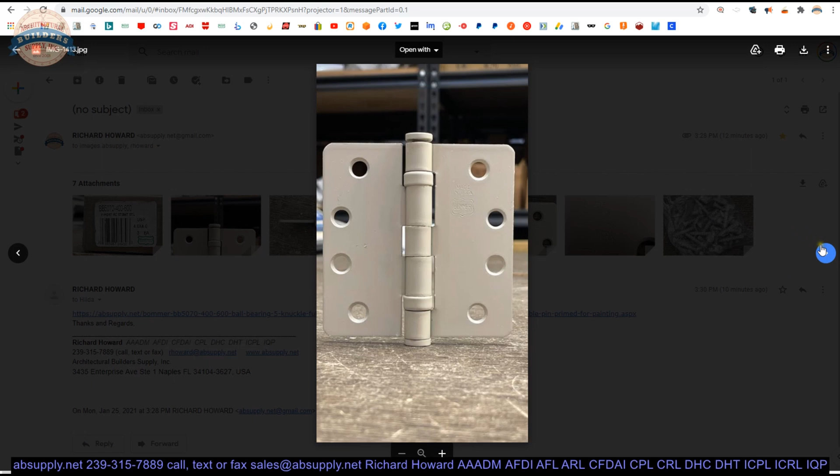Here is the item that we are looking at. There are some images linked to down below. Let's take a look. Here is our box showing our part number. That's our hinge. That's showing the swage on the hinge leaf there. That's the bend. That's what literally makes it a full mortise hinge. When you change this bend on one or both leaves, you're changing inherently the DNA of the hinge.

The back side of the hinge. Please note these bearing packets. Just study these vertical lines. I'd like to point something out to you in a moment. The logo, the knuckle construction, close-up of the Bommer logo, made in USA. And then your screw package.

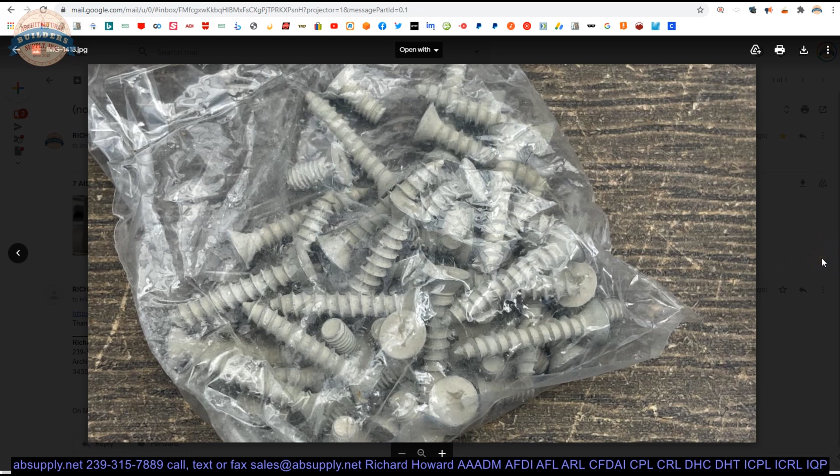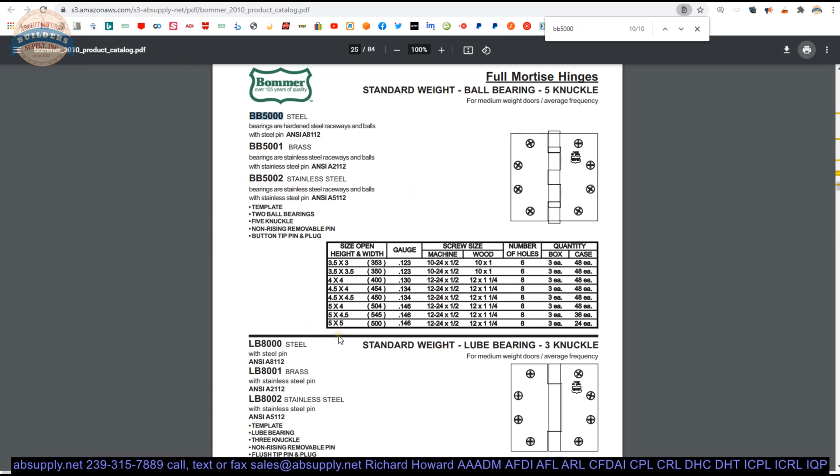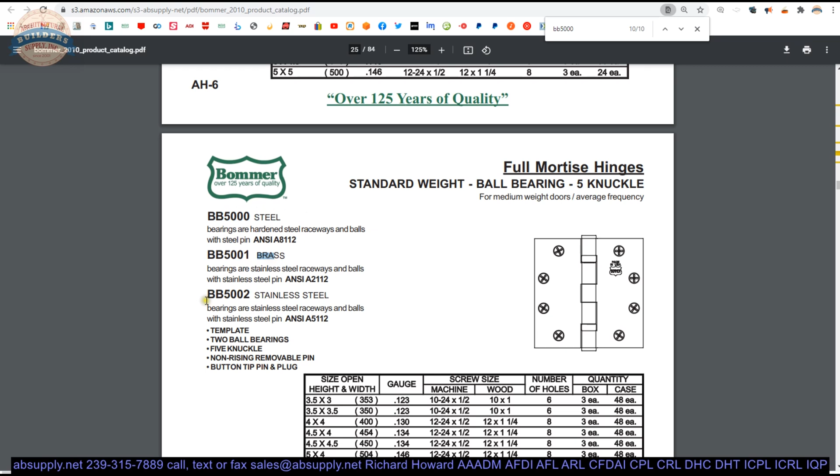Now, there is a link below this video to the cut sheet, and here it is. BB5000, that's the series of hinge that we're dealing with, and I'll show you how we get to the 5070. And the important part about this is it gives you how the part number changes when the base material changes. This would be a BB5071 in brass, a BB5072 in stainless steel. Gives you a chart of all of the available sizes that you can order this hinge in. Obviously, we're doing a variant where we have a radiused corner.

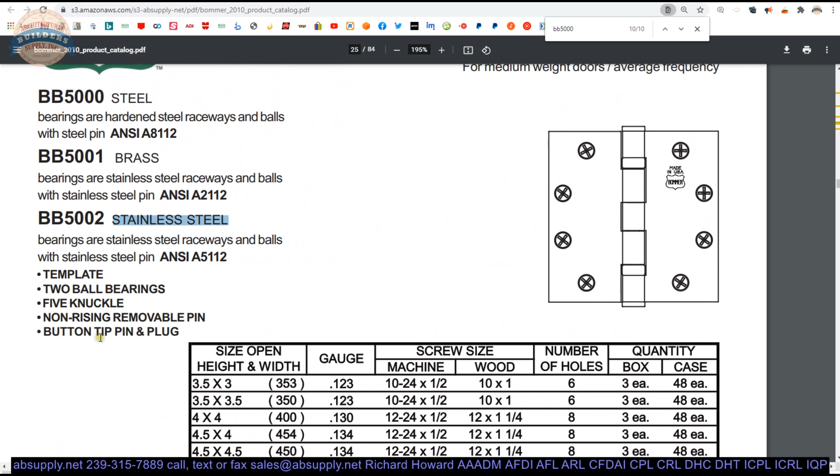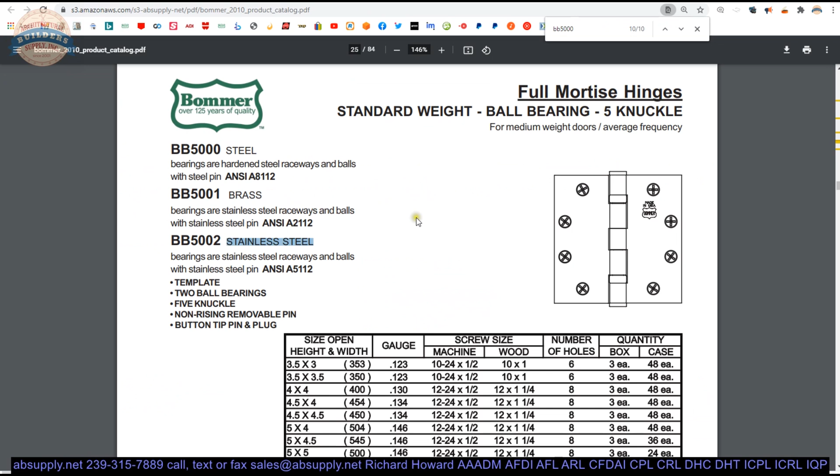Now, you'll note that vertical alignment of the barrel. Okay, nobody really thinks too much about it, but some people do. There are options. You can do a 3-knuckle hinge. This is like a concealed bearing. It's a cleaner look. So if you're concerned over what that hinge looks like, you can order it as a 3-knuckle, and you won't see those bearing packets. The friction reducing part of the hardware is concealed. A really nice looking finish, because that's going to be kind of what you see when the door is closed, this perspective here. Okay, so that's the cut sheet.

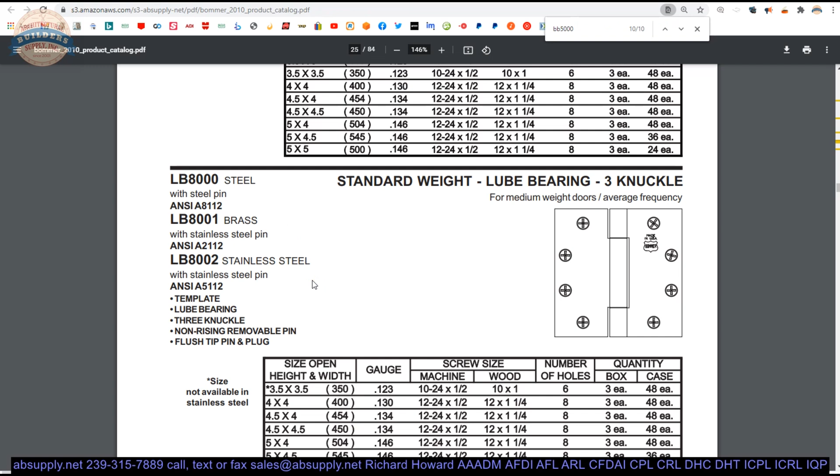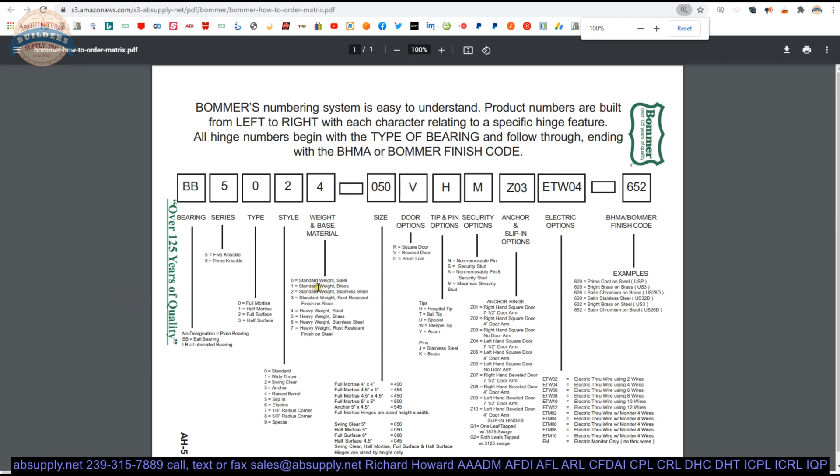Now there is a link below this video here to the manufacturer's page, and when you click on that, our landing page in our site for Bommer will load. I'd like to draw your attention to the how to order matrix, and this is the single page document out of the manufacturer's catalog that tells us exactly how you would put the part number together.

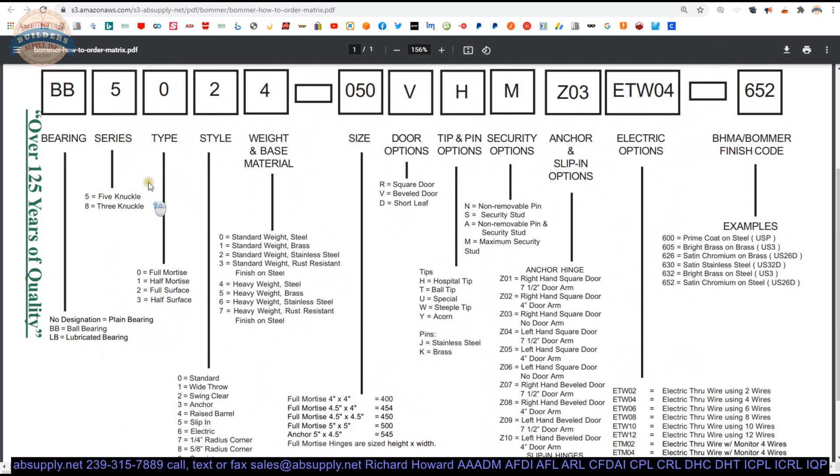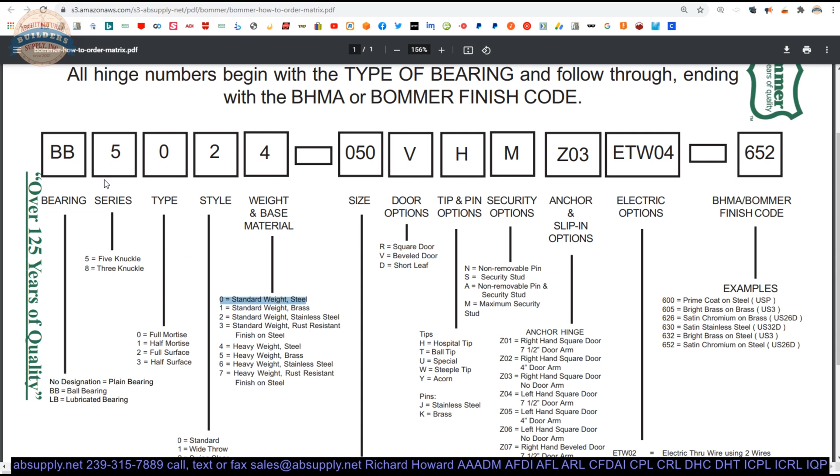So it's BB for ball bearing, 5 for 5-knuckle, 0 for full mortise. You get down here to the 7, that's the 1/4 inch radius. 8, I was correct, 5/8 radius. 0 for standard. And then your 0 for standard weight made of steel. So you can see how that part number is built. So a really handy document. It's the way by which you can determine what kind of hinge you're building.

Also with this hinge, the client could have ordered it as a non-removable pin or added some other type of security feature to it. If this door swung out, you would certainly want a non-removable pin or a security stud or both that will prevent that pin, or all but prevent the pin from being driven out of the hinge. Or if the pin is driven out, the security stud will prevent you from separating the leaves.

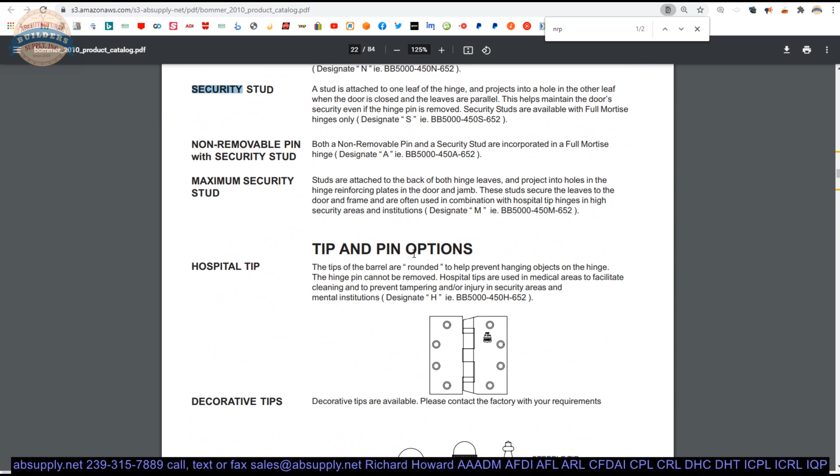Because this is a residential hinge, we should talk about decorative tips. I know that this is going into a residence. Ball tip would not be uncommon. Acorn tip or steeple tip. There are other tips that other manufacturers have. Square. Urn is another common tip. But Bommer offers, in addition to the button tip, which is the standard tip, ball, acorn, and steeple. Ball is by far the most common of the decorative tips.

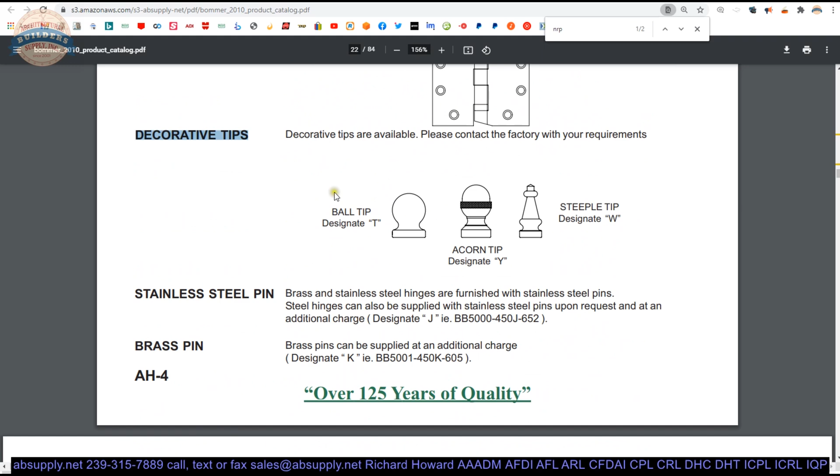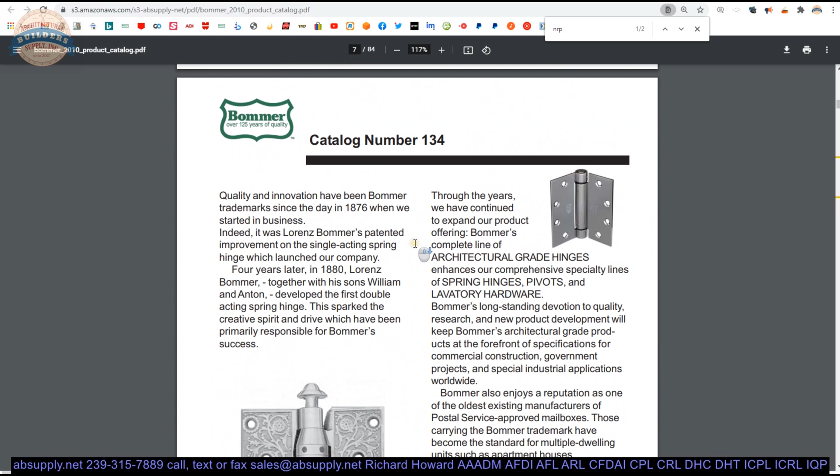This catalog is pretty handy because it will allow you to review all things Bommer related, but it's also like an introduction to Hinge College Course 101, because it will talk about all of the different terminology. What is a full mortise versus a half mortise versus a half surface versus a full surface versus an anchor, a slip-in, a power transfer, a raised barrel. All these different features, all these different hinge types are discussed here, and it gets right into it. Here's a formula for determining the width of the hinge that you need.

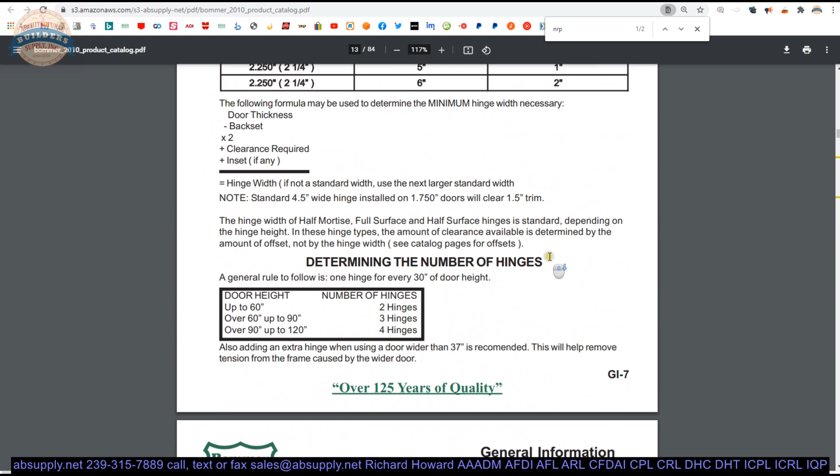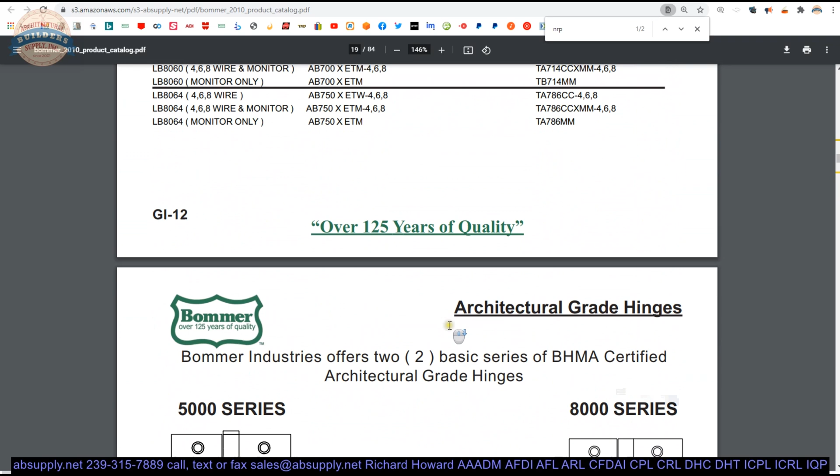A table that will allow you to help determine that. Talking about the hinge swage that we had mentioned earlier. Obviously a handing chart, cross-reference chart. Lots of important documentation here. Should you need to or want to dive into the world of hinges, this would be a great document. If you work in commercial hardware, it's required reading is the bottom line.

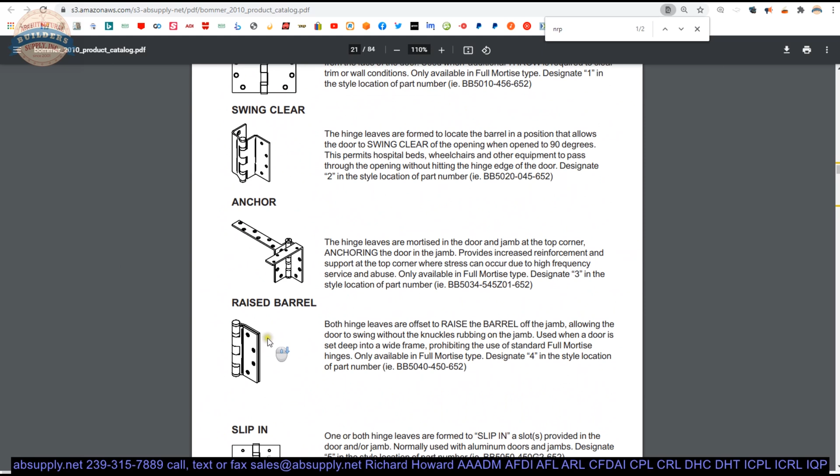Full mortise, half mortise, full surface, half surface. Wide throw, swing clear, anchor hinge, raised barrel, slip in. I mentioned all of them except the swing clear. Security options, etc. So a really great document to dive through.

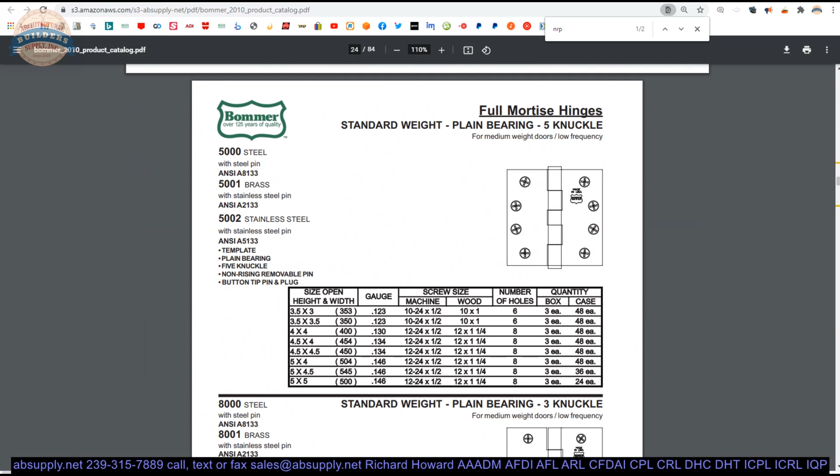The ball bearing hinge is nice to have because the leaves will operate rather smoothly. Plain bearing hinges will be lacking those two bearing packets. And what happens with a plain bearing hinge versus a ball bearing hinge is you've got these knuckles just wearing on each other over time. If it's a high trafficked door in a residential application, if it's the garage to the house, the front door, that kind of thing, versus the linen closet that you might be in three times a week.

On those high traffic doors, you're going to want to use ball bearing because it won't be evident day one, the substantial advantage to ball bearing reducing the amount of friction. But in 5 years, 10 years, 20 years, you are absolutely going to notice a substantially different amount of wear pattern when you're using a ball bearing hinge. What happens is the hinge knuckles grind themselves down, the metal fatigues and falls off, and now your door is literally not sitting in the opening correctly.

Then what happens is the homeowner will tighten up the screws, and then they'll strip the screws, and now we've got a problem. Now someone runs drywall screws into it, because what you're trying to do is bring the door back up because the latch is not hitting the strike anymore, because that hinge is worn to the point where the door is now sagging.